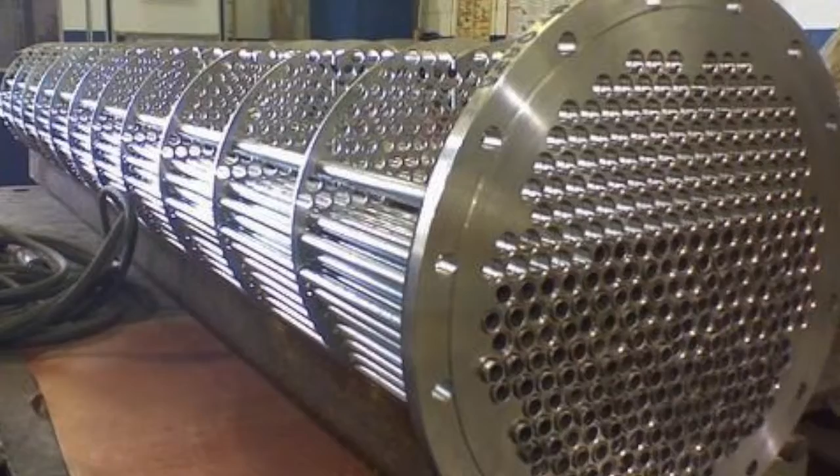The first problem shows a heat exchanger which handles 0.0567 cubic meters per second of water through the pipe system. We can see the system in the figure shown. The total pressure drop between the valves, including the valves, is 110 kilopascals. Both valves are gate valves open 3/4. We want to know what size pipe is required for this system, aka the diameter value. We consider the system to be stainless steel.

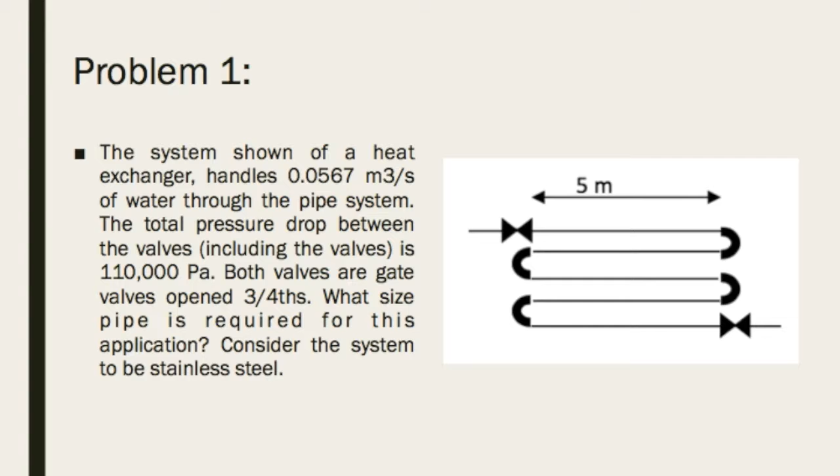Following, my classmate Manny is going to explain the process we used to solve this problem. First of all, we have to make the global energy balance to discard the irrelevant values. Since we are only designing the heat exchanger, we can assume that there is no heat. The system also has no work, no potential energy, no kinetic energy, and no velocities as well. We also assumed that the massive flow rate tends to 0.

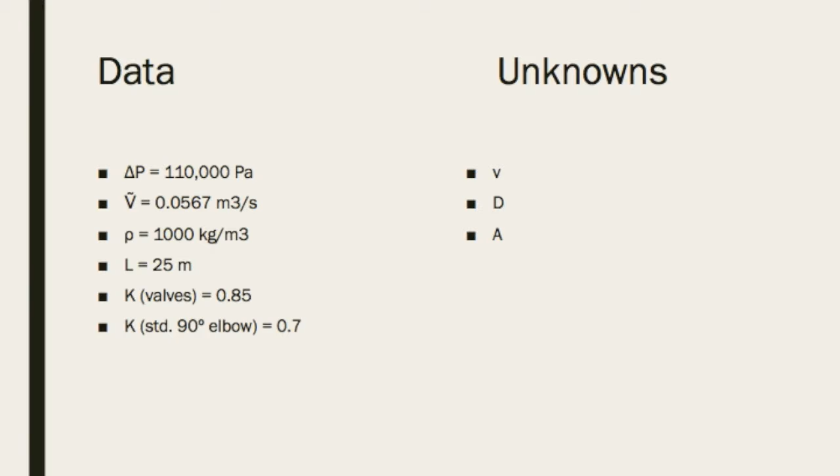Now, the information given by the problem states are delta P, the volumetric flow rate. We assume the density. We know our length and value of K. We read them from the tables. Therefore, the unknowns are velocity, diameter, and area.

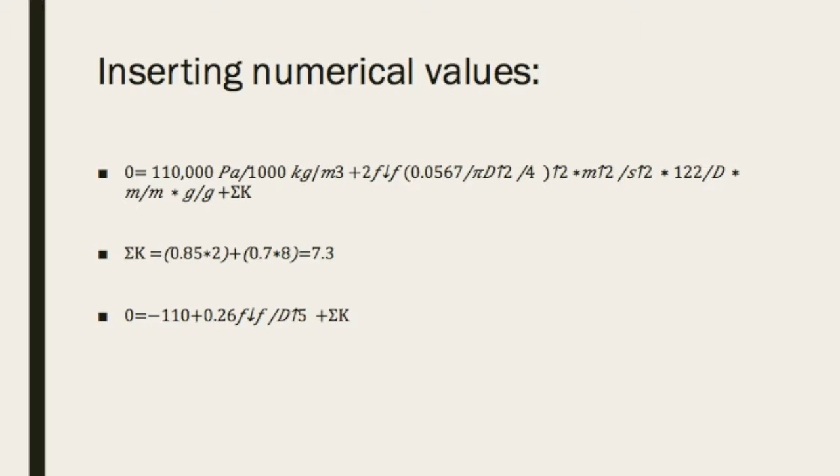The diameter is included in the head loss term, but cannot be solved for directly, as the friction factor also depends on diameter. Inserting numerical values, we are going to assume that our friction factor value is 0.0042, parting from the value given by the professor in class. Now, by isolating D in our formula, we obtain the value of D to be

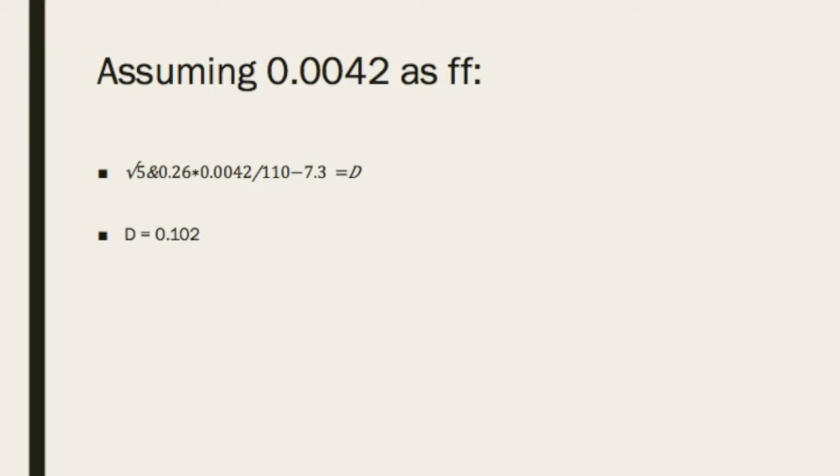0.102 meters. With this value, we can now calculate the area and the velocity in order to calculate the Reynolds number. Once we have the Reynolds number, we go to the graphs to check the assumed value of friction factor. We notice that this value is the same that we assumed.

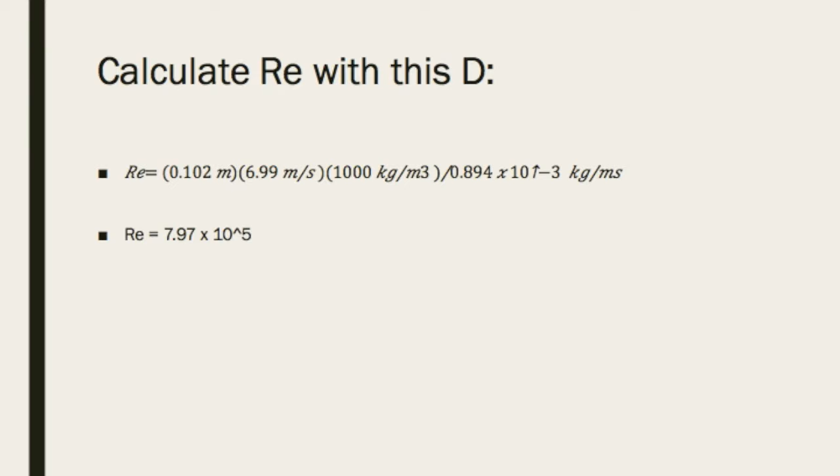Therefore, the size pipe required for this problem is 0.102 meters, and that will be the final answer.

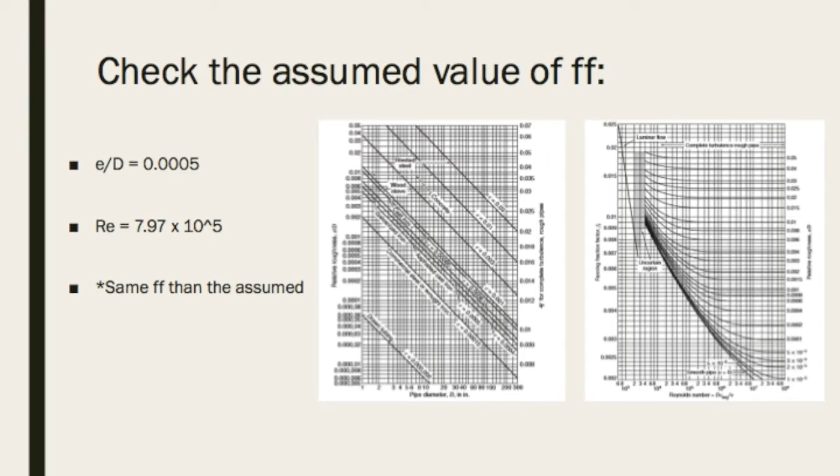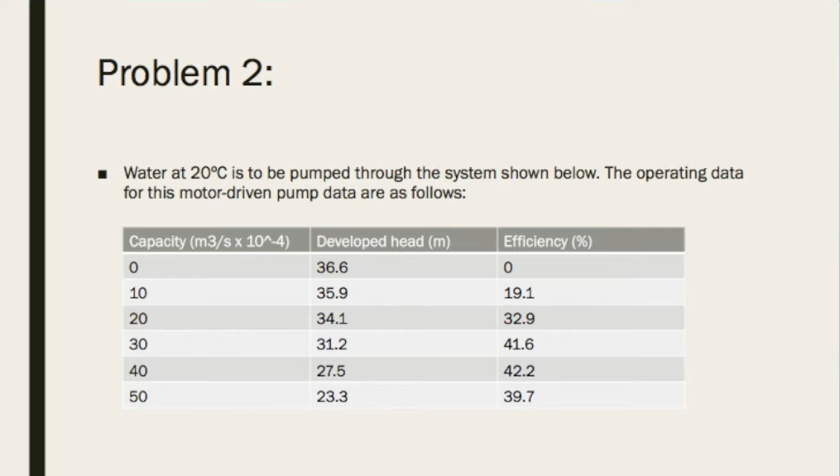The inlet pipe to the pump is 0.06 meters in diameter, commercial steel, and 8.5 meters in length. The discharge line consists of 60 meters of 0.06 meters in diameter steel pipe. All valves are fully open globe valves. Determine the flow rate through the system.

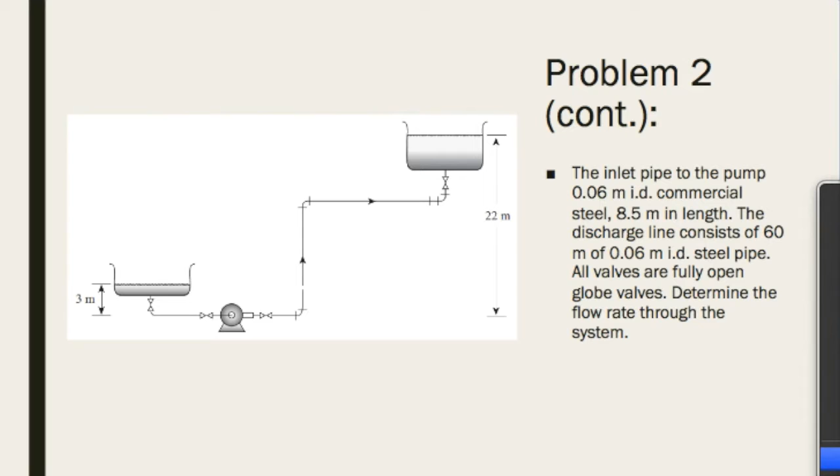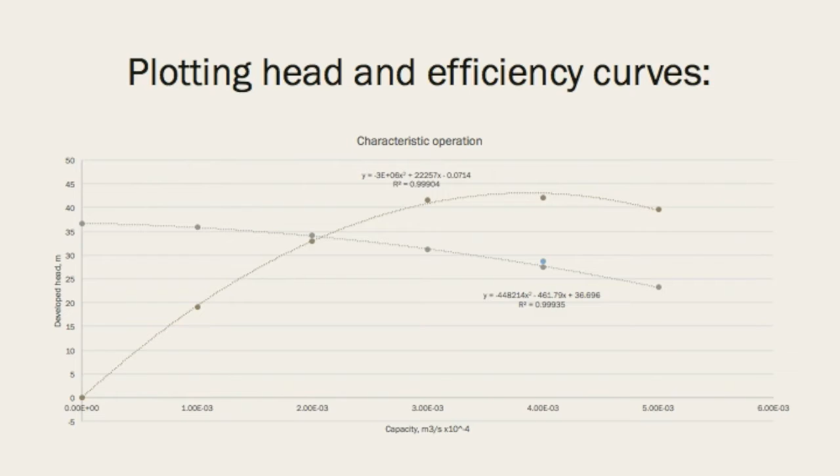First, we perform the energy balance. As we can see, the balance equation results in head is equal to height difference plus head losses. Then we plot the head and efficiency curves. Assuming the highest efficiency of the pump, we give the flow rate a value of 0.004 cubic meters per second.

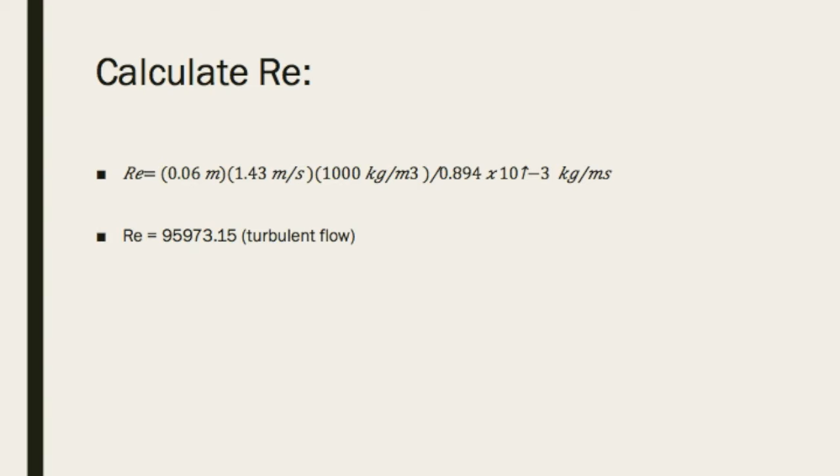Next, we calculate the area with the given diameter in order to calculate the velocity. Once we have the velocity, we calculate the Reynolds number. As we can see, we have a turbulent flow. Since it's a turbulent flow, we use the following equation to find the friction factor. We get a friction factor of 0.0088.

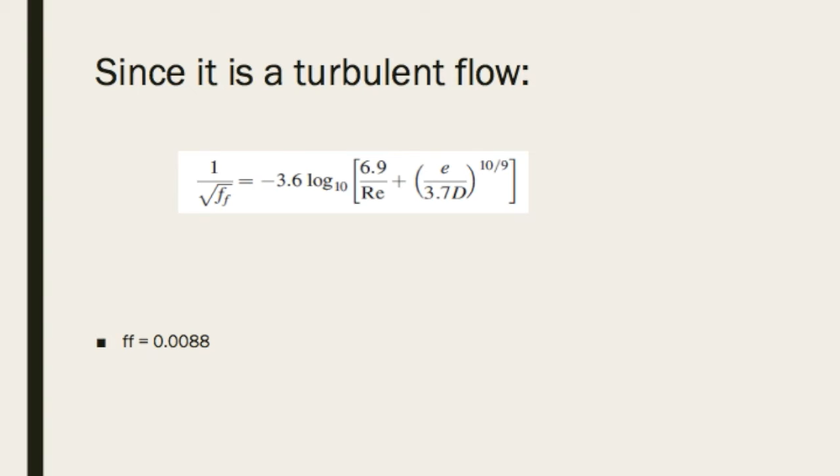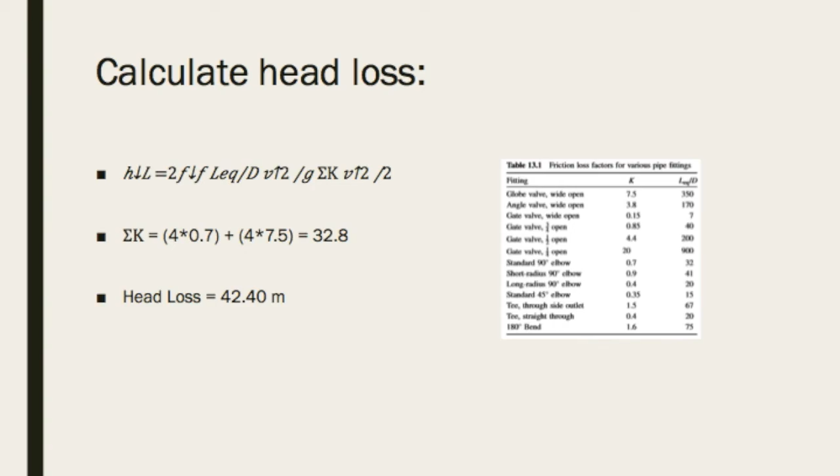In this problem, we consider 4 standard 90 degree elbows and 4 fully open globe valves. Following, we calculate the head loss considering the values of K for the losses of valves and elbows. Once we know our total head loss, we calculate the head using the height difference. As a result, we get a head of 61.4 meters.

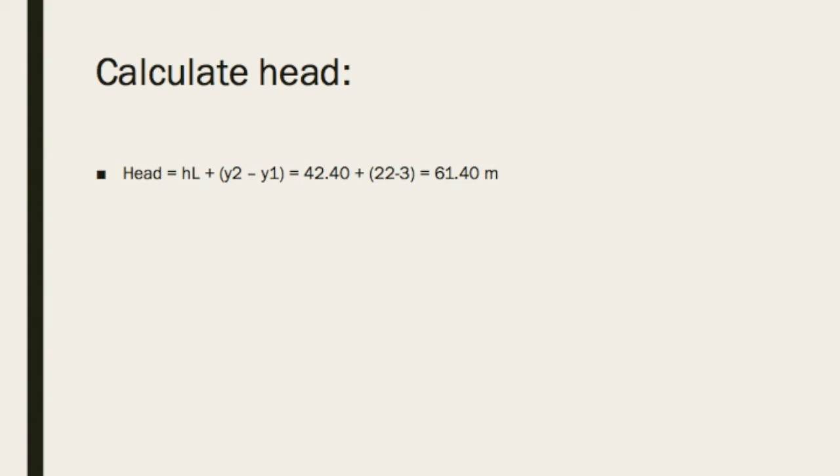Finally, we calculate the work needed in horsepower. Hence, assuming the highest efficiency of the pump, the flow rate for the system is 0.004 cubic meters per second.